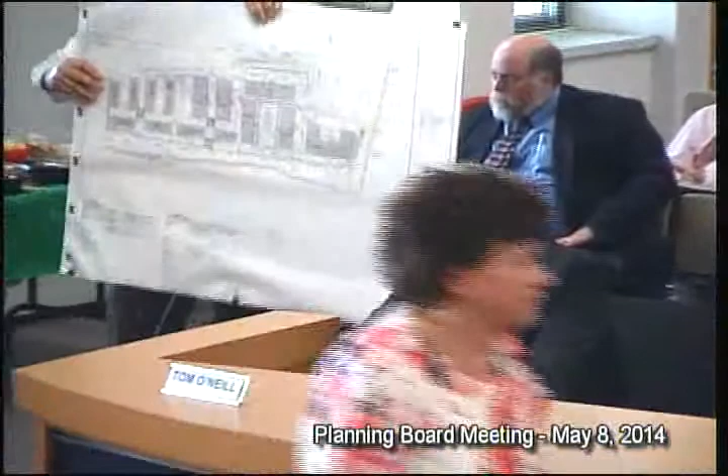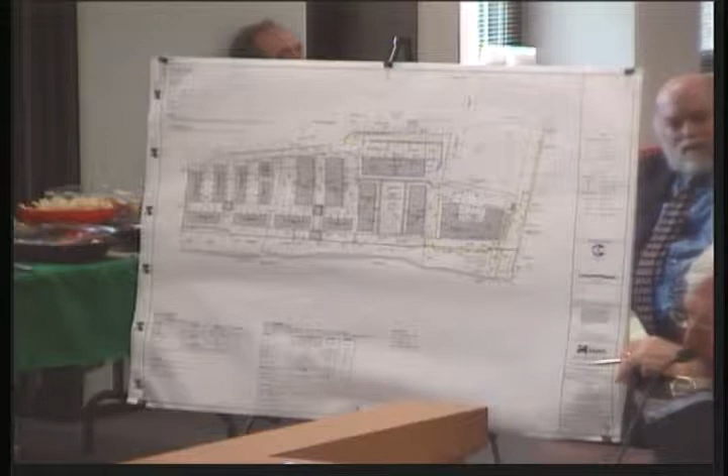Can we move the easel so the camera can pick it up? That way people will know where buildings A, B, C, whatever are on the site plan. All right, Carol, that's much better. We also have another floating microphone over here if you want it. It sometimes takes 5 or 6 seconds to warm up. Wow, haven't heard that in a while. Could we get the city to come get all this technology? We're having a green screen installed next, for weather forecasts and all. Just don't wear green pants. Technology, wonderful, there we go.

So to orient everyone and have an understanding of what the project entails, the site plan is probably the best place to start. Everyone knows where the Dutton site is on the riverfront. It encompasses both the town of Poughkeepsie and the city of Poughkeepsie proper. About 2/3 to 3/4 of the site is in the city of Poughkeepsie, and about 1/4 to 1/3 is in the town.

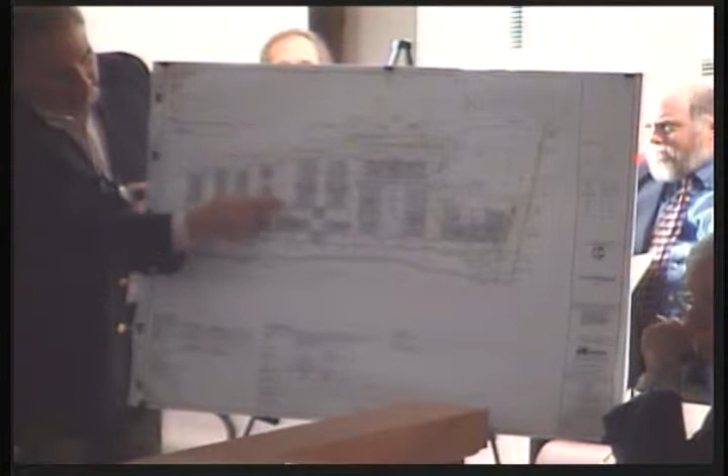The river is here, this is North Water Street, so the site sits between the river and North Water Street. It borders Dutchess Avenue on the south side, and the Hudson River Rowing Association property on the north side. There's a line that bisects the city property, which is really where Kidney Creek runs—an old riverbed.

So for the most part, from the Kidney Creek town-city line to the south, you can see there's a slew of buildings that we'll call building A, B, C, D, E, F, and then there are two we call stacked townhouse buildings that are along the riverfront itself.

In the town portion, we have stacked townhouses along the river. We've taken these stacked townhouse-style buildings and made them parallel with the river. From there, we have perpendicular buildings behind them that create auto courts between the buildings. So when you're on the river, or on the circulation spines of the site, especially in the town portion, you don't see the garage doors—you see the front porches. When we go through the architecture, you'll see the front facades have porches and windows that look out to the river and the views, but not the garage doors you've seen in a lot of other projects that we don't like.

The city side, again, we have two stacked townhouse-style projects, buildings here, and you have buildings E, F, behind the two stacked units. There are 4-story buildings, all, but the C and the B buildings are perpendicular to the building.

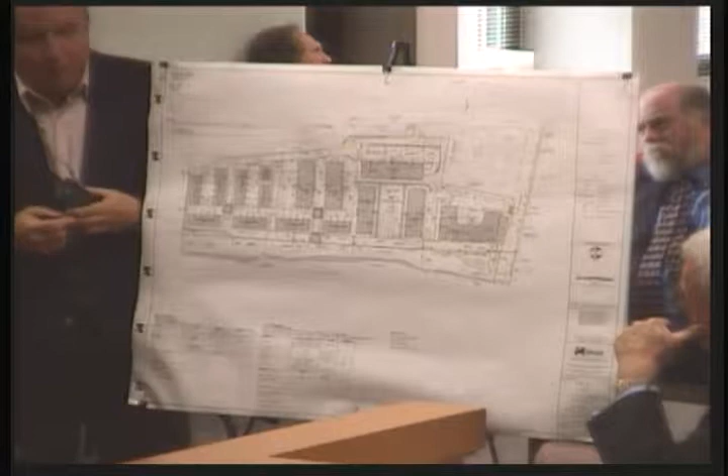So as you come down Dutchess, you would enter the site here at the end of Dutchess, and then you would come along the riverfront itself.

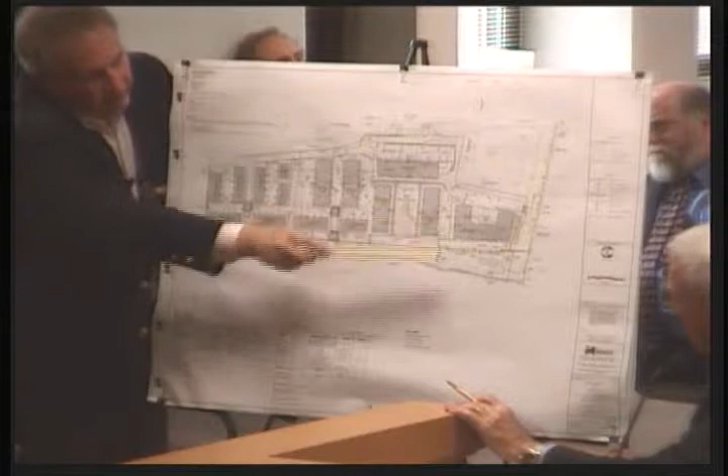The idea is that it gives a nice view for everyone who comes in, and even if you have a unit in the back, you still have the ability to see the river at some point during your day. We've also created vistas through the buildings. You don't have one large building or 2 or 3 large buildings; you have the ability to look through the vistas down these alleyways towards the river itself. So for the most part, I think we figured about 70% had views of the river, in some way, shape, or fashion.

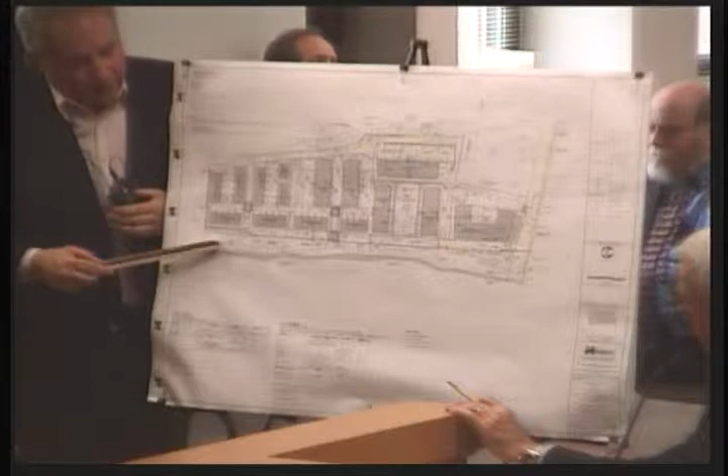The park itself will be built along the banks of the Hudson River, and it'll have an esplanade going the full length of the park itself. There'll be drop-off points, and there'll be access certainly from the project down onto the park and to the river.

The idea is that this project will be phased, and I believe it's 6 phases. If the board would like to see how it will be phased - but essentially this is a brownfield site.

It's been cleaned up, and you can see that the owner has put a tremendous effort into that cleanup. Before and after is amazing, even in its current state today. And at the end of that cleanup, there will be a capping of the whole site, and it will have basically grass and vegetation on the whole site.

Initially, the A building will start off the project, and right now the portion in the town is on the 6th phase. The park itself will be built about the 84th unit. Once the 84th unit is built and needs CO, the park has to come onto the site and be built in its totality.

Let's see, we'll go through the architecture now that we're oriented. This is the - do you want me to hand these around, or how do you want me to display these? Can you get them on the screen? Yeah, we'll come over.

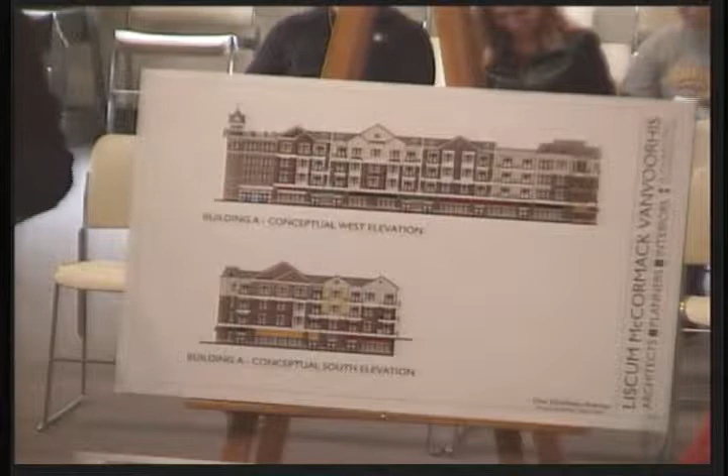There it goes. There we go. Perfect. We need easels over here.

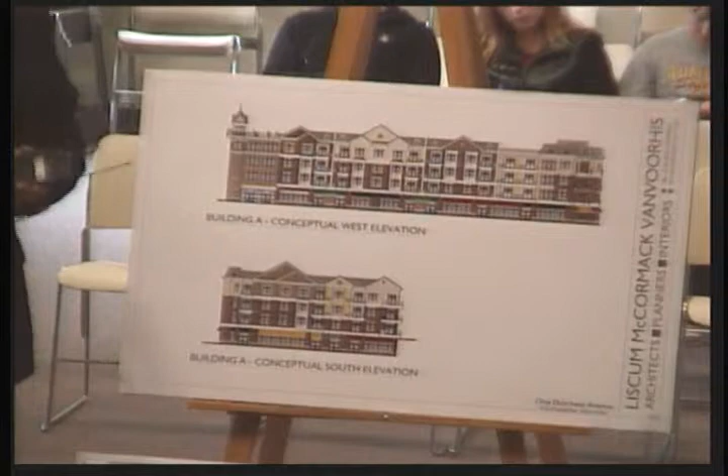So this is the A building, and what everyone can see - this long elevation is what you would see from the river itself. The shorter elevation is what you would see coming down Dutchess Avenue proper. And what we've done is we've created a facade with various materials: brick, HardiePlank, siding.

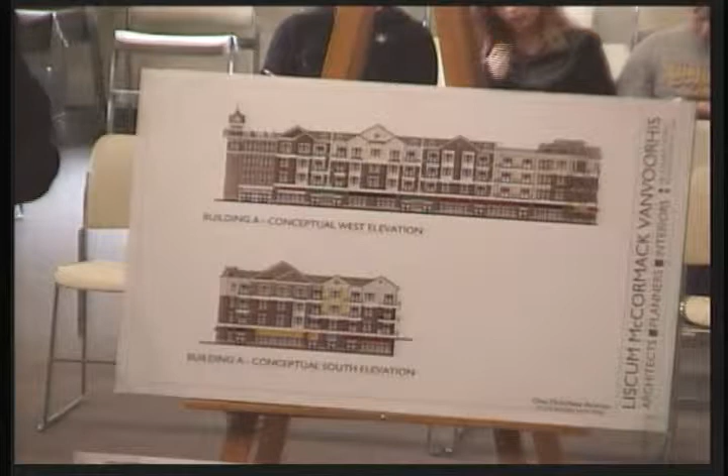We certainly have shingles and stone. We put stone in the elevation, and it actually makes a varied elevation in and out. It's not all one piece that's very flat - you have ins and outs that are 2, 3 feet and 4 feet in delta, so it creates a very varied elevation.

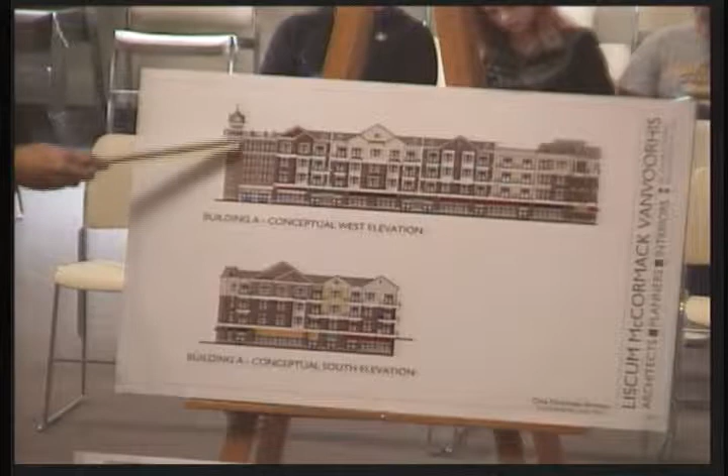We've created a tower element on this elevation that goes towards the northern part of the building itself. That tower element will actually have a rooftop garden area for residents, and potentially whomever else. There'll be another rooftop garden on the southern side of the elevation so that people can go up to the upper floor and enjoy the river itself.

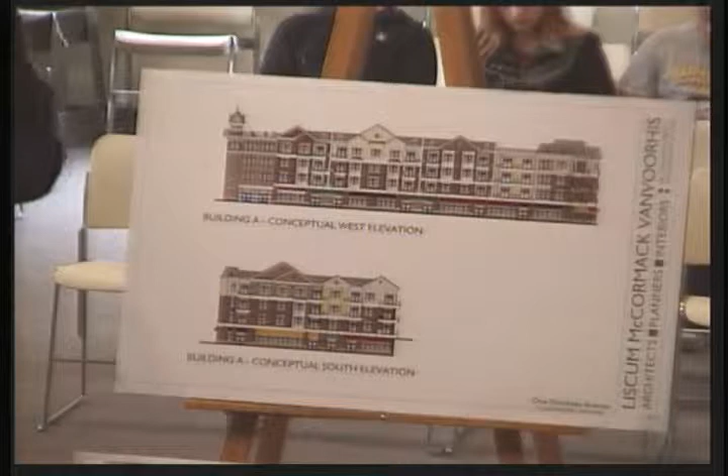This building is a mixed-use building, so the 3 floors above the first are residential. The first floor is retail and office and more commercial. It'll also have amenities for the site itself, indoor amenities such as a pool, health club, just space for like movies, things of that nature.

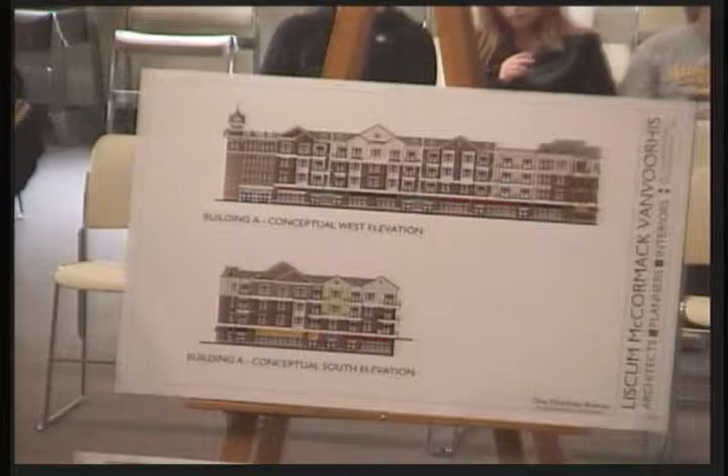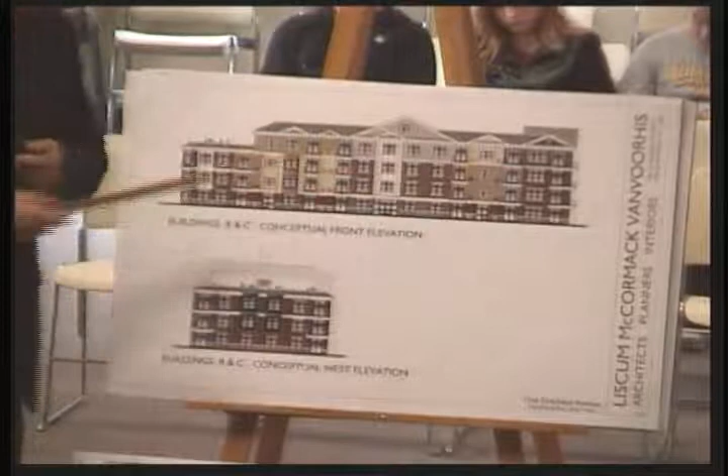The B building, let me see - let's go to the B and C building. The B and C buildings are the ones that are perpendicular after the A building. These are perpendicular to the river, so you would actually see this facade, the shorter facade, from the riverfront. You would see these facades from inside the inner court.

Between the B, C, D buildings is a courtyard. The courtyard is for amenities, outdoor amenity space for the residents. It'll have a pool, spaces for outside entertainment.

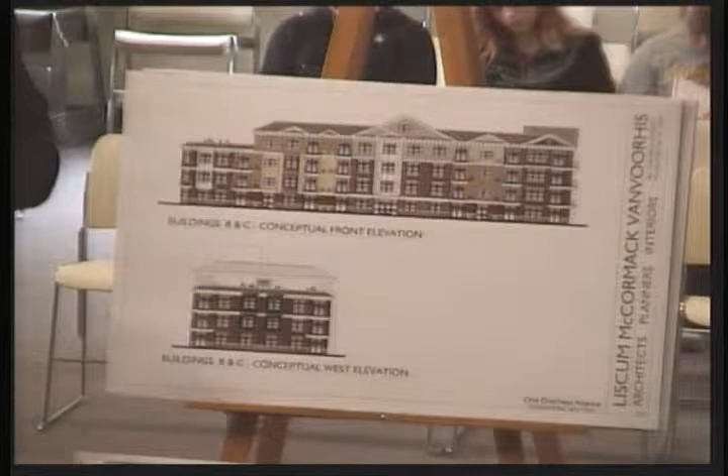It'll have anything that you could think of in terms of entertainment. If you wanted to live there, it's a great space to just hang out on the river, overlooking the river.

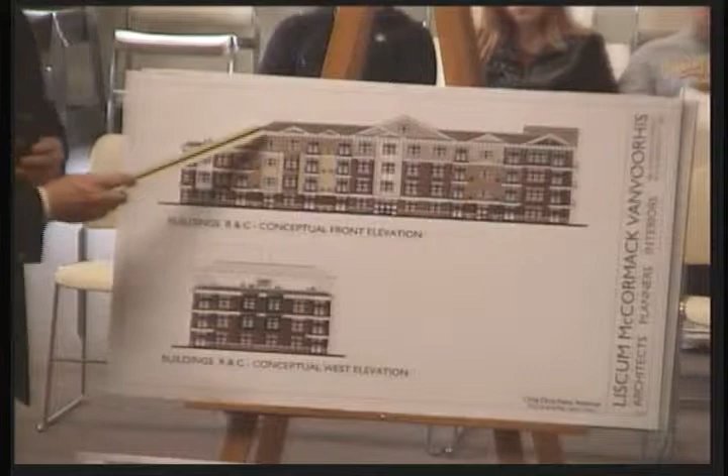We've also created a stepped effect with the B and C buildings, where the facade towards the river proper is 3 stories. It'll have another rooftop terrace on both the B and C buildings for the residents, and it steps back up to the remainder building for a 4-story building.

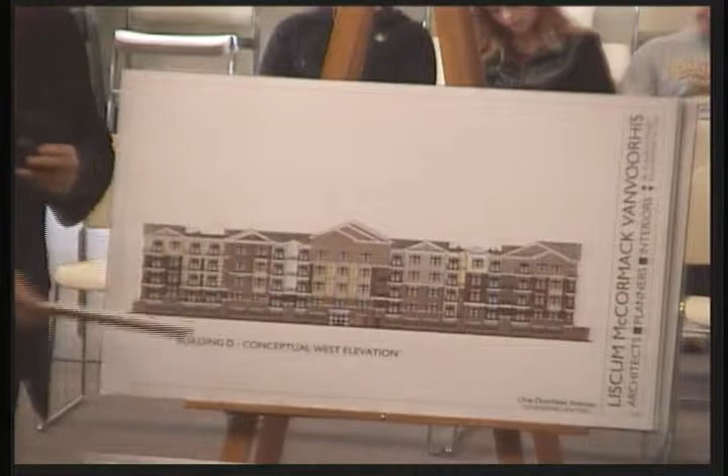The D building, which is actually the furthest building away from the river proper, you can see what it does. This is the backdrop. This is where you have the structured parking, and you have the building on top of the structured parking. It'll fit into the hill, so the building around the sides actually slopes up so that it creates a nook, a notch into the hillside.

Again, what we've done here is we've also given some rooftop garden areas on the upper level, and it creates a backdrop for the B and C buildings to the D building. And they all actually tier up away from the river.

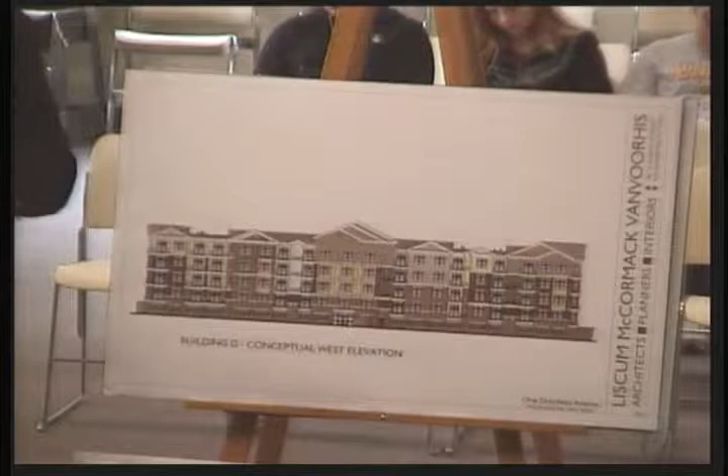So if you think about it, buildings B and C have a 3-story structure, going to a 4-story structure, and then as it slopes up, the D building is higher than those. So it won't be one flat level building whatsoever. It will give a courtyard that has hierarchy from the back and sloping down towards the river.

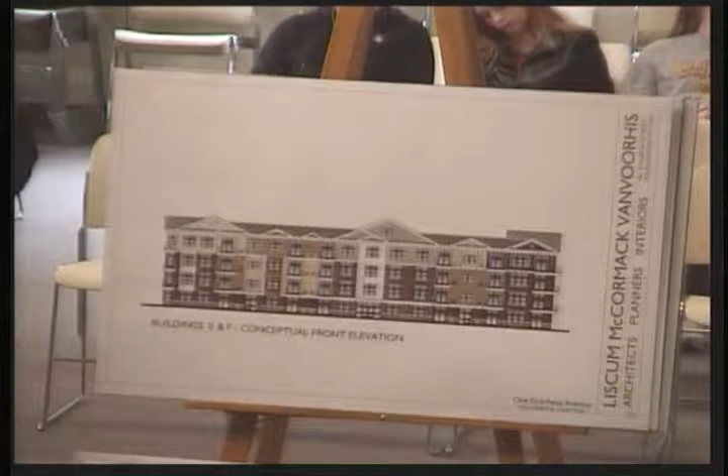The E and F buildings, which are behind the stacked townhomes, are again perpendicular to the river, and they look very similar in terms of the architecture of the B and C buildings.

The texture of the buildings themselves are varied, and I'll show you some thoughts of how we arrived at this. But all the materials are inherent to the area and relative. We certainly have brick, sidings, and different types of roofing that we're using in the different neighborhoods of the city and town of Poughkeepsie. Again, it's not like you would find this in Phoenix, Arizona or Dallas, Texas. These are materials, and the shapes and forms are what you see around us.

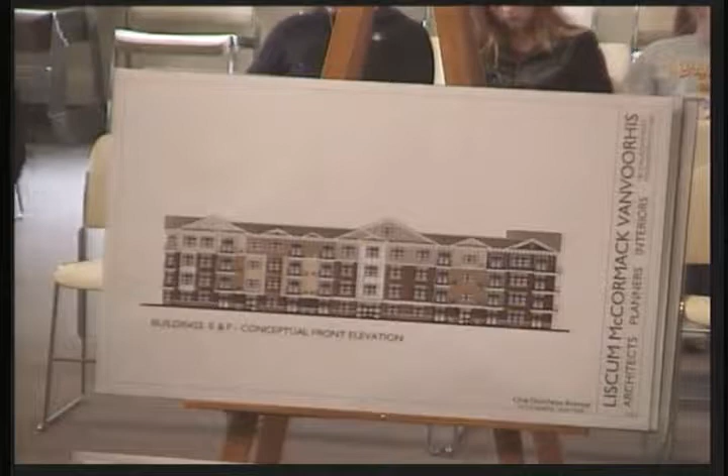The stacked townhome buildings are essentially, as we said, stacked townhomes. This longer elevation and this one are actually side-by-side buildings that you would see from the riverfront. This is the front of the buildings. The back of the buildings would have the garages. You don't see the garages unless you're really driving your own vehicle onto the site.

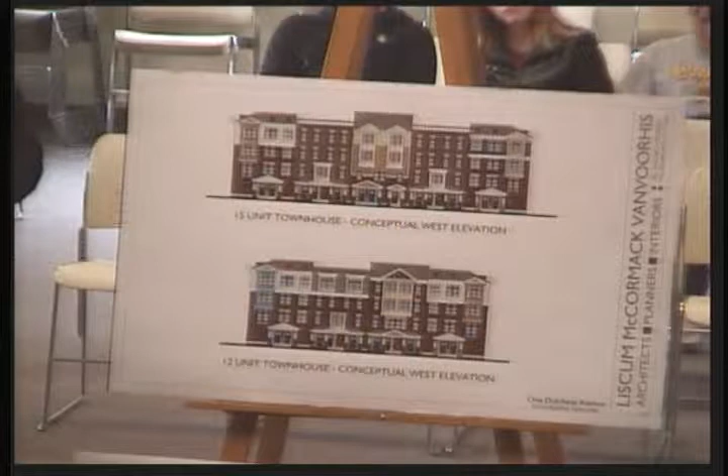You shouldn't. Along the front facades, we have porches and things of that nature, so that people can, if they wanted to, sit out or walk down to the river, walk out into the neighborhood. And again, the ups and downs and the varied roof types are there to give a varied elevation, so it starts to look more organic in terms of its growth than non-organic.

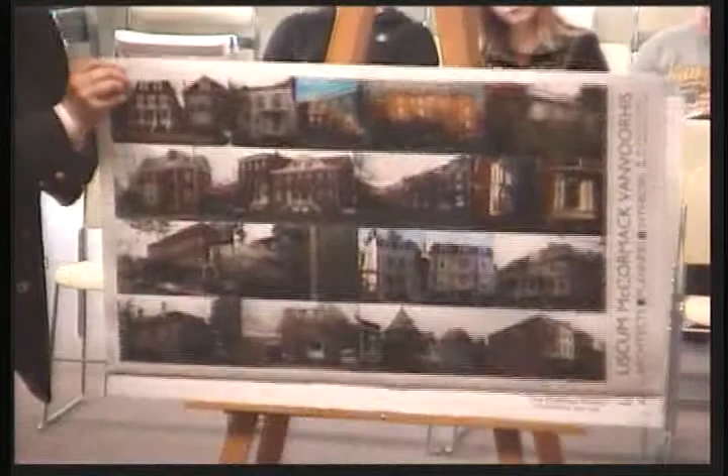We took some shots around the area proper, and you can see where some of the architectural elements have come from. As an example, these pop-outs and jut-outs, like around this and these areas, and on these buildings, these pieces that are popping out in different areas are certainly inherent in areas on Eastman, which is right here.

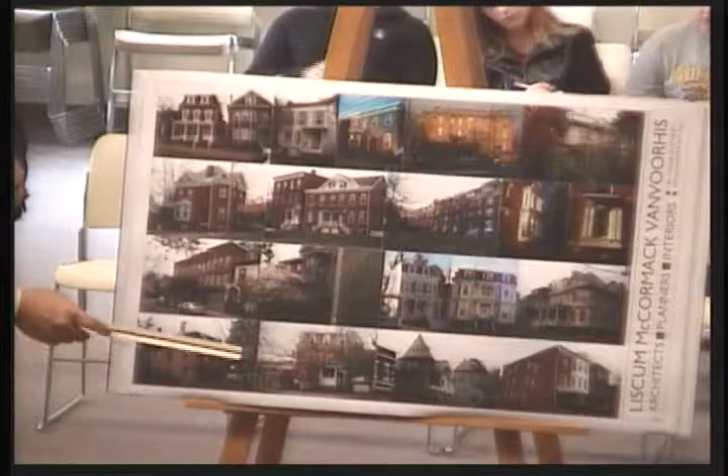These type of elements we have, certainly you can see that element, which on the B and C buildings reflects a mansard that actually does not have a rooftop garden, but that's the idea. You would have a rooftop garden on top of that mansard.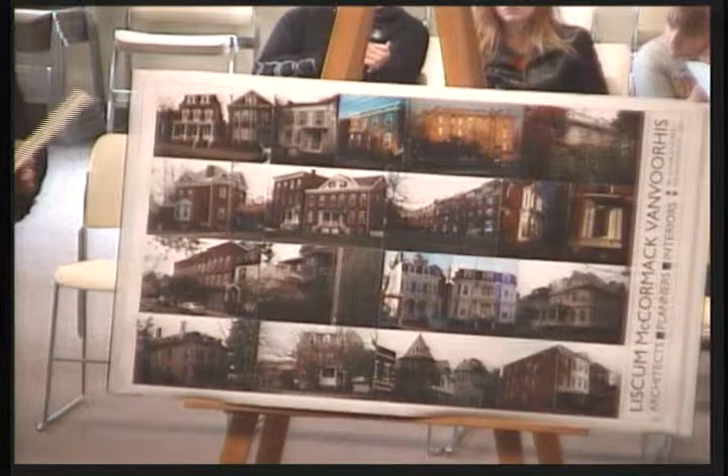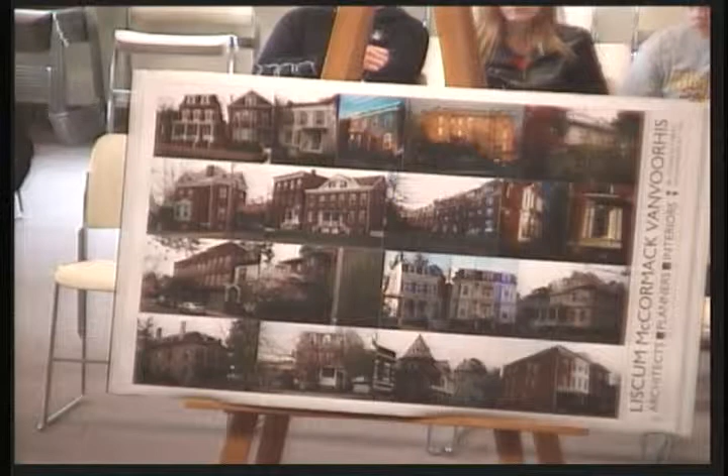Again, we have these sort of dormer elements all over that we find in our area, the pop-out element, the row house idea, we have clapboard, and all this type of architecture that we see proper in our area is being implemented into our design on purpose. Again, brick, siding, some detailing in terms of the facades, that's what we've tried to replicate.

Questions? What about the town? These are in the town and the city. Depends where you are. What's that? Oh, no Galleria. No, we aren't going to go to Galleria.

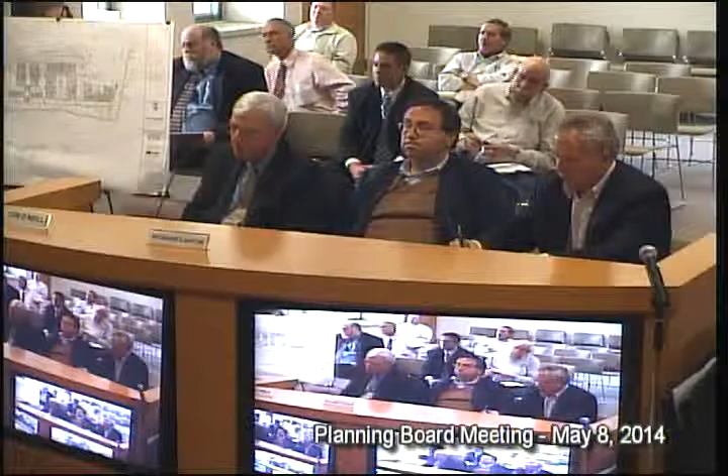The cleanup effort and capping at the DeLaval site, if I'm not mistaken, took out a tremendous amount of dirt, had it cleaned, and then brought it back. I don't know if the procedure was the same kind of routine here, or different. Lou, or maybe Andrew, can you answer that?

Good afternoon. Did you want to grab the floating mic? Sure, basis for the residents.

Are you asking about the process of the cleanup? The soils - there was demolition involved, underground and above-ground storage tanks removed. No soils were cleaned and returned; they were exported off-site. All of the export has been completed, and it went to various landfills that accept these contaminated soils and other debris. They won't be returning to this site.

In its place, under the very careful guideline and auspices of the DEC, we've had certified clean fill placed on the site - that process is happening right now. Above the existing soils that were not removed is a demarcation layer, essentially a visual reminder of where it stopped, like orange fabric, and then the soils go above that. There's approximately 150 to 180,000 yards of fill being imported right now - a significant amount.

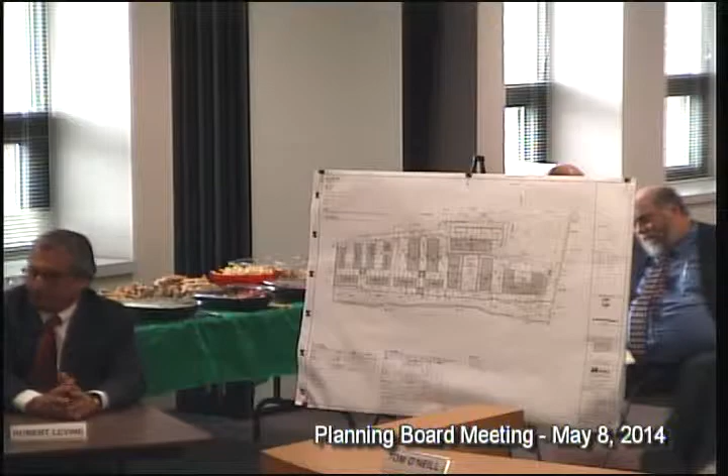Okay, we've gone back and forth in terms of construction point of view and financing and things of that nature. The phases are as shown here, but we think that in terms of how we'll actually construct it, we probably will build buildings C first, which are 41 units.

Well, hang on a minute. You guys aren't even agreeing on what you want to do. I don't want to do your planning in front of this board, so you need to give us some idea at what point you're going to get to 84. It's just a new question, that's the change.

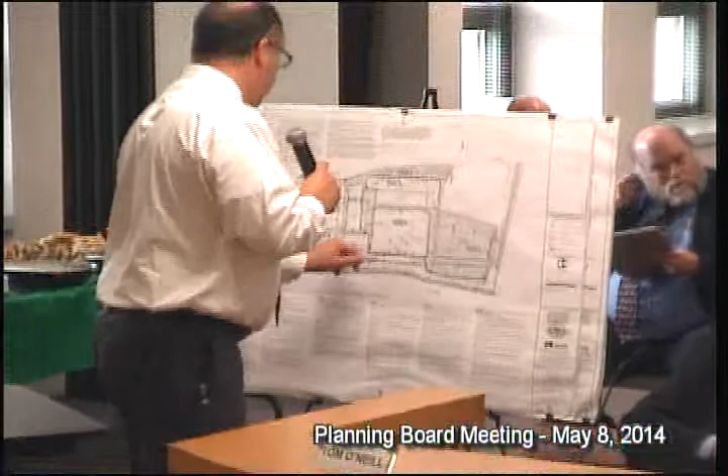The phasing, first off, was not a conflict. Our phasing was, number one here was 51 units, and then we were adding in another 12 and 15 on phase two, these townhomes. Phase three would be the park. So we'd be under that 84 units before we did the park. 84 was the limit, was the maximum. We probably were not approaching the maximum.

Well, it was 84 before you had to get the park, and the park had to be completed. So the question was, is it going to be building A plus some number of units in building B, or is it A plus building part of C or D? No, the phasing is building A, utilities and other necessary, and then these two townhomes that are in the city.

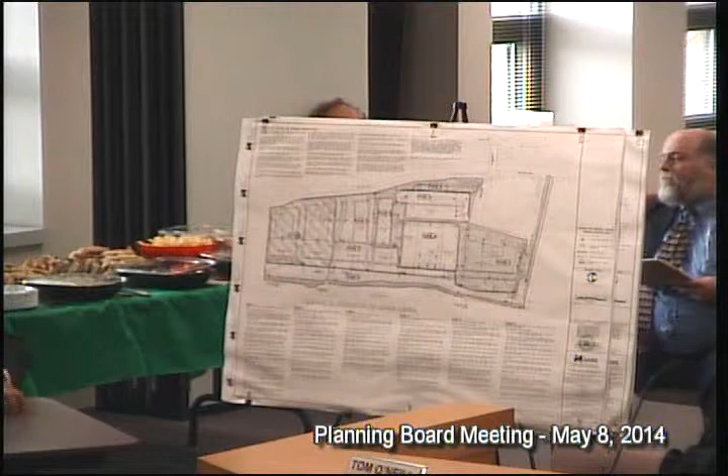There's 12 here, 15 here, and then the 51, so we're under 84, below the maximum number of units. And then we build the park, and then the project continues. And that's what the phasing shows. That's the plan of record, that's the one you have, that's the one that's been submitted to the city and the town as of January.

So it sounds like you're going to have a discussion about that at some point. Well, things change. Understand, sure, but that's the plan as of January. Okay, great, thank you, good question.

One more question. The cleanup, is that going to require ongoing monitoring? After you get a final letter from the DEC and they go away, or is there ongoing monitoring required? Lou, could you answer, that was my question. Ongoing, he says, ongoing. So would we receive copies of the reports issued by the DEC or whoever the monitoring agency is? You got to come up and talk to the microphone so it's recorded.

The DEC is the monitoring agency, and it's annual reporting. So they conduct the testing once a year? Yes. Okay, great, thank you. And it's right there in all the approved plans. It's a publicly accessible document, and I can't say with absolute certainty, but I believe the town and the city might be directed specifically.

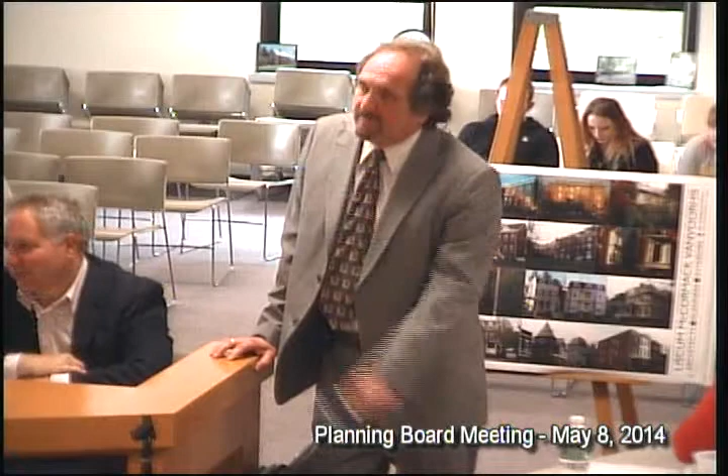Yeah, I guess I like that Peter took my question about the 84 unit there, so that was good, got that out in the open. I like the rooftop gardens that you've included on some of those. It looks like pretty consistent architecture between the town and the city, those buildings, the townhomes.

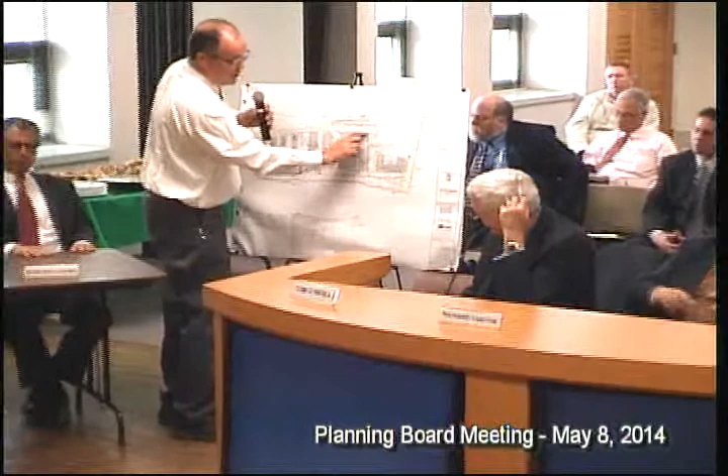Thank you. Does the parking garage access come all from North Water Street there, or is there some access coming from within the site as well? Oh, it comes off of North Water Street. It's all just off north, and then right, well, a little bit internal, but never from the river proper. You could access it from the roadway. Oh, you could, okay, you could get in this way, loop down underneath. There'll be circulation on the lower floor, whether from the garage, which is underneath Building D, to the garage, to the first floor of the garage here. You could access off North Water to the upper level of the garage, or go down to the bottom, proceeding to the development proper, or going right into the lower level. So a number of ways to get there. Okay, but it's mostly off of North Water, Carl. Yep.

Have you made any, back to, I guess my last question is concerning the trail.

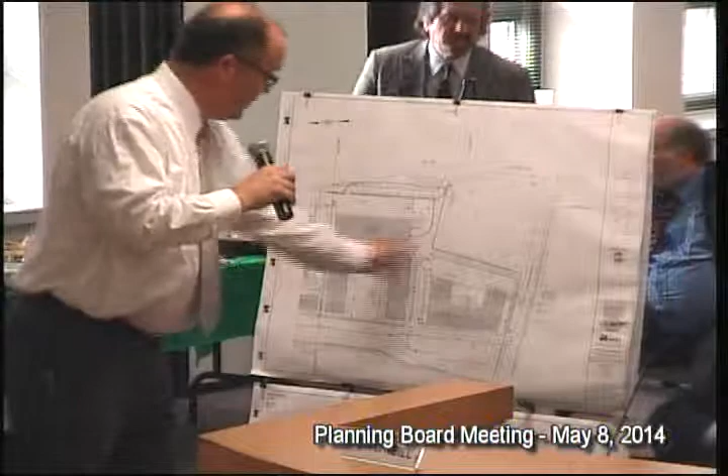In order to make it easier to see, what we did was split the site about in half - not on the municipal boundary, just to make a larger scale - so we showed the southern half of the site on one side and the northern half on the other. So I'm looking at the southern side. The park right now, of course, we're going to have riprap going down into the water to provide a wave break.

Say elevation 0 is where we're going to start. The park begins at about elevation 4, rises ever so slightly across the path, and then slopes up - I believe we had a 1-on-3 or 1-on-4 slope - up to about elevation 10 at the road. The 100-year flood in the Hudson River is elevation 8, so the park would be permitted to be inundated during a 100-year storm, and storms slightly lower than that, similar to other parks on the river. What happens is the water comes up, deposits floatables, trash, lumber, floating logs and so on, which would have to be cleaned up - similar to what's done in parks up and down the Hudson.

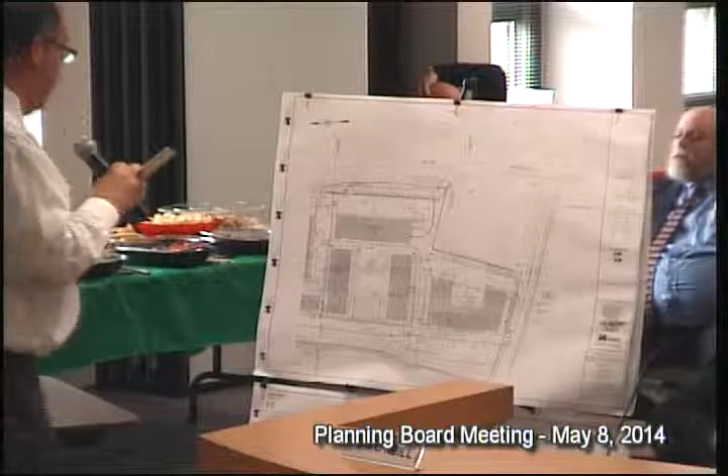The roadways are all up and out of the floodplain, so emergency responders can always get in, no matter the storm event, over the 100-year storm. The 100-year storm elevation was 8. The lowest elevation on the road is around 9.5 or 10, so we've got some freeboard, a factor of safety there as well.

For the buildings, I'll give you elevations—I have them on another plan. What happens is the roadways rise up, just like the site does now. It's very low at the river's edge, and rises mildly as it comes back. There's a rock cut in this area that's very steep, and we're going to maintain that; we're not going to change it.

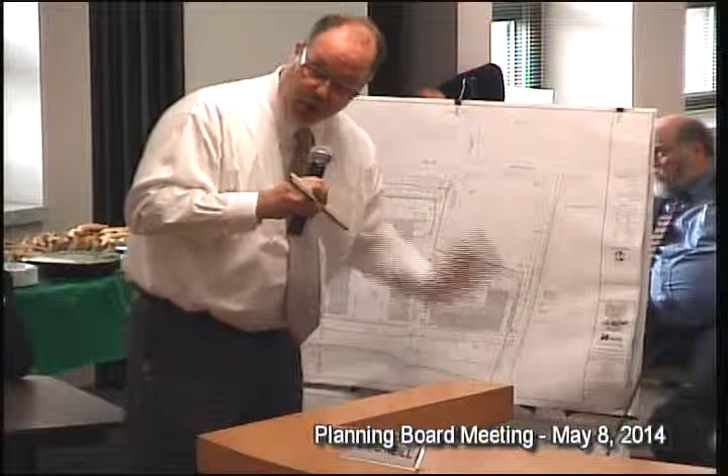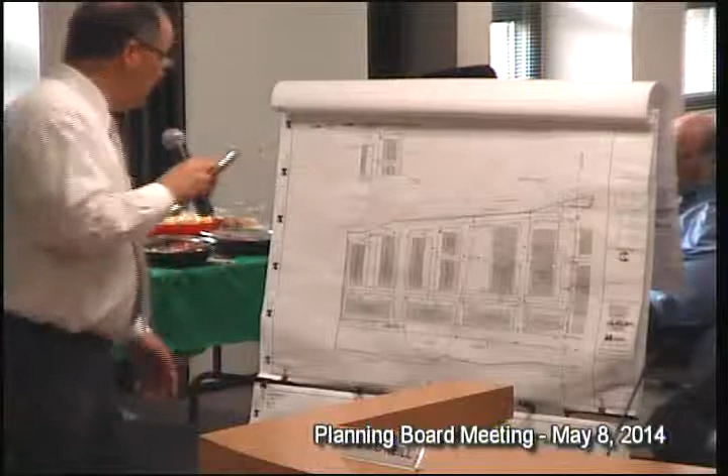All of the homes will be about 3 or more feet above flood stage—we're very conscious of that. We just had Sandy, which was the equivalent of about a 500-year storm event because it backed the water up and wouldn't let it go down the Hudson. We're conscious of that. The 500-year storm elevation is about 9.7, and we're well above that with both the first floor and the roadways. So we took all that into account.

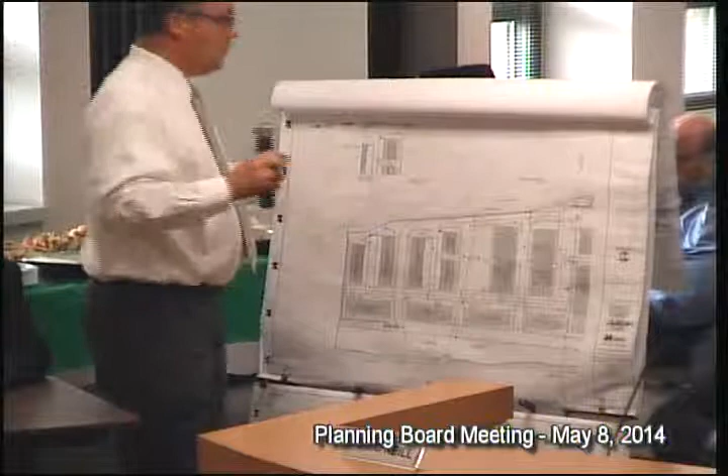Maybe we should put this on the table, Andrew, and respond. There have been requests by interested parties that the park area be raised higher than we're proposing, to keep it out of the storm area. It's my understanding from Lou—and I hope you can help explain—the position of the applicant as to why we cannot raise the park higher than described.

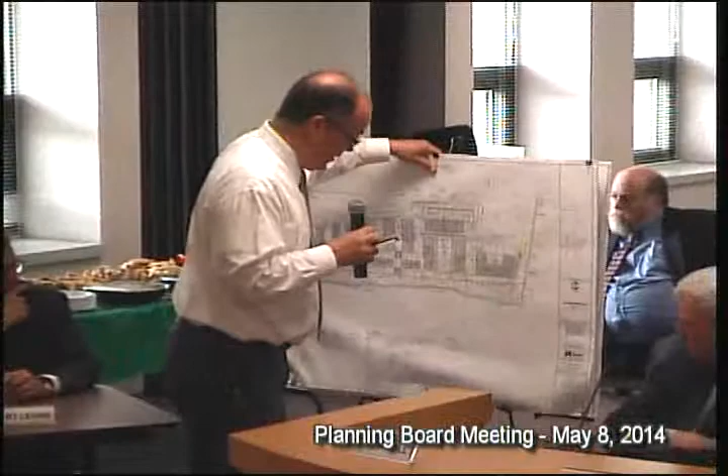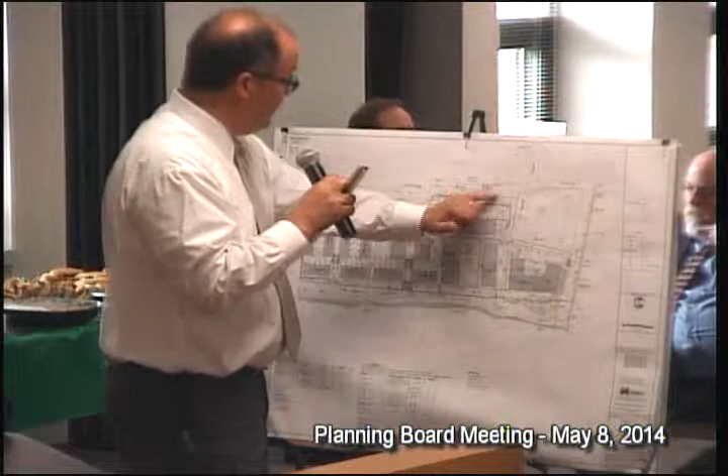One of the most contentious things about the entire development is the size of the park. We want to keep it as large as possible. This plan illustrates some changes we've made after the plans were submitted to you, so this isn't a plan you have. The plan you have shows parking inside the park—we removed that. We added a cul-de-sac, made this all public space and open to circulation, and brought the road back down to the bottom. But we still have to negotiate with the property owner to do that. We just can't fit everything.

So there are a couple of things we added to the plan. We're proposing riprap at the waterfront, similar to Waryas Park. We've heard the comments—Jeff left, but we heard him, we got his book, and Liz had the same comment I think—to do some soft shore. So we're going to mix it up; we do have some soft shore proposed. It wasn't on the plans you received, but we were going to mix it up.

That soft shore rises back at about a 1-on-2 slope, so for every foot you rise, you lose 2 feet of park. We can't go farther into the water—we're not filling any more into the water—we're going back from there instead. So the farther you rise, the farther back you're coming.

There's a tremendous cost to bring in this fill as well. And there's no sense having a park above flood stage when no one's going to be there at flood stage—nobody's going to be walking along the river during a 100-year storm, not in their right mind.

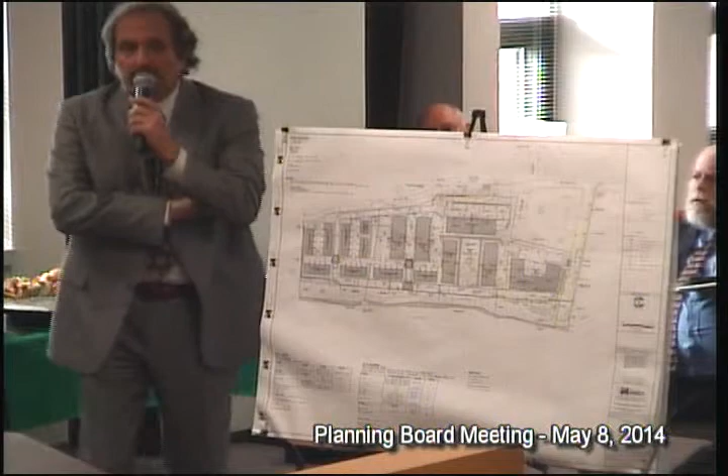One more point worth making: the parks along the shore are all at one level, so raising our new public park another 5 feet would be totally incongruous with the entire walkway and the Greenway Trail. And the final, maybe biggest concern, is that this is the approved plan with the DEC, and to vary from that would require a whole review and years of delay.

Okay, thank you. John, could I ask a quick question? Go ahead.

Just real quick, I like parks, don't get me wrong. But one of my issues here as a fire chief is trying to get in and out of a building, out of an area, and you've taken the parking away for the park. Where do we anticipate these people leaving their vehicles? We have regattas, we have Balloon Fest, parking down at the riverfront when these events happen. It makes ingress and egress very difficult for us as the fire department, especially when we have large numbers of people here.

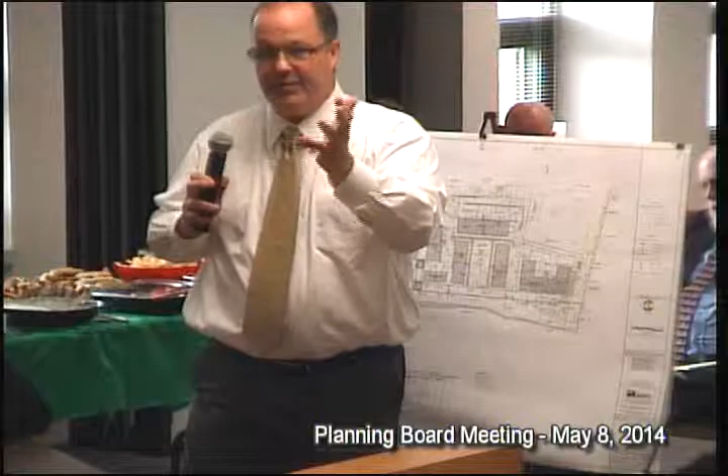Right, we heard that too, lack of parking for events. We got that from either the city or the town. We're fortunate enough with Dutchess Avenue to have a 70-foot wide right-of-way, probably the most conventional thing that all your board members have ever seen on any of these subdivisions is 50 feet. It's 70 feet wide, and it affords us the opportunity to do a great deal of parking on Dutchess Avenue.

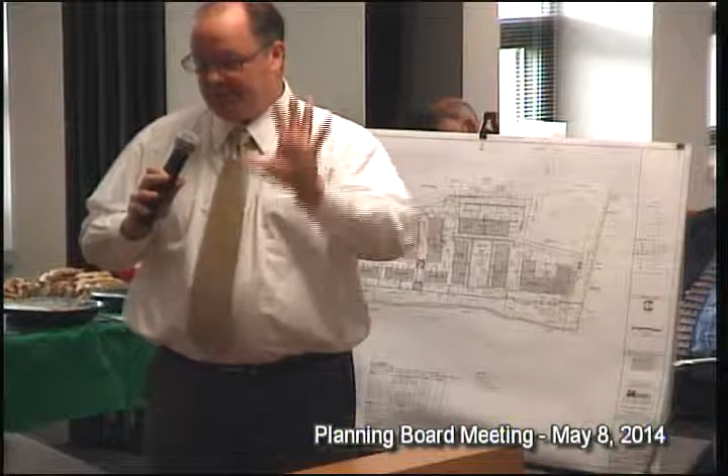A couple of spaces down at the bottom at the cul-de-sac, and this circular area here is open to the public. We're probably going around Building A, and we'll have to mark some of those spaces off as private so we have enough for our property owners, the residential, the retail users. So there'll have to be some division of those spaces, but we did add quite a few spaces utilizing Dutchess Avenue, still giving you I think 26 to 28-foot minimum width. 26 feet is correct.

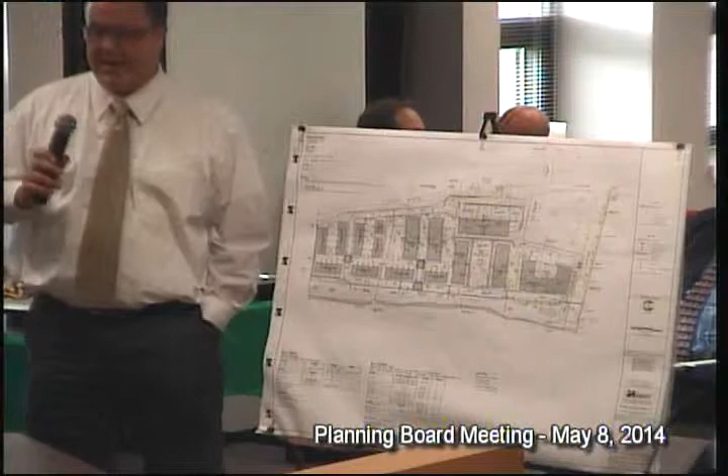This is probably an irrelevant question, but would the owners here, the condominium purchasers, be required to have flood insurance? No, because we're up and out, up and out by feet, like three and a quarter feet above the 100-year flood stage right now. So the answer is no. The other reason we did this, we didn't want to have that terrific burden on these owners or drive some owners away. So the answer is no.

Thank you. Neil, did you have something? Question, and actually I think this is really more of a question for Tom and Robert and Naomi. There was a plan circulated roughly about a year ago that had the development of the parkland as Phase 6. I stated my objections to it, and it got moved up to Phase 3. It seems to me, however, that even Phase 3 seems a little late in the process, particularly since we're now talking about city takeover of the ownership of that.

And the city's ownership of the parkland, speaking for myself, gives me comfort that it ensures public access to the waterfront, and ultimately that something will occur there in the way of paths and whatever else. I don't know ultimately what the city may choose to do with the park aside from the walking path. If you want to put swings and things like that down there, that's entirely up to the city. But I guess the question is, the representation is at the end of the process we will have a design for the waterfront, whatever that may actually look like.

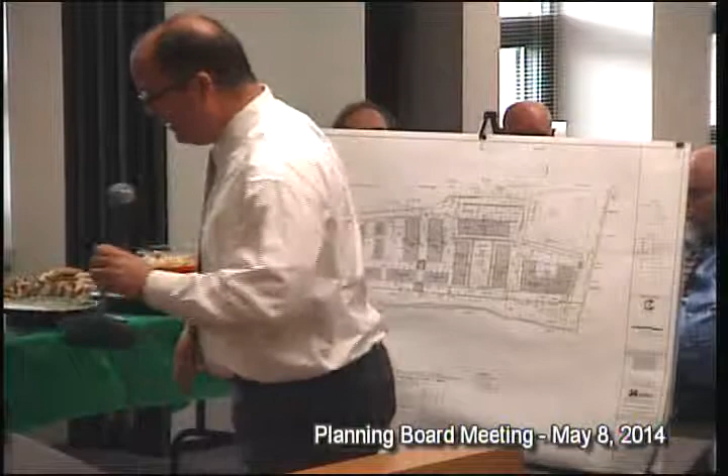But we have to understand that we had to generate some income to build the park.

Let me ask the question a different way then. I know that the town certainly intends to seek recreation fees for the residential units that will be constructed here, and that's independent of whatever may happen to the waterfront access, the public access. Is the city contemplating the same thing? Or are you looking to accept whatever you may have otherwise received in recreation fees to develop the parkland?

I don't know, I'm asking the question. Our board, I don't believe, has had that discussion. Because up until recently, this was, in essence, a joint venture with the town, and it is only recently that we've been approached with the concept that the city and the town's portions of this project would proceed independently. So I don't think we ever got to that actual issue as far as a final or semi-final determination.

And it's part of an ongoing process that has been very difficult. So you're still trying to figure out how this thing is ultimately going to be, who's going to pay for it and how it's going to be constructed. You may have design, but there's the implementation portion of it. Somebody's got to pay for it. Absolutely, we're not there yet. Through no fault of the planning board's. No, I understand.

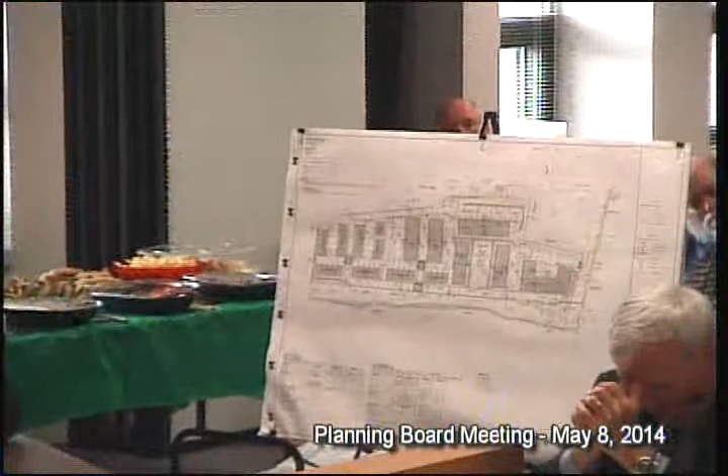Yeah, thank you, Mr. LaPerche. Yes, the state has looked favorably on the project, has already granted through the city, as the grantee, monies for the design of the park, which we were providing the matching funds for. So it was up to about $500,000, of which we were going to provide matching funds in the form of the cleanup that we were investing now.

We hope that the state will again look favorably toward implementing the construction of the park as well and help us with that, because we're not seeking funds from any of the municipalities. I think that's what Neil is also implying though - as soon as you have state funding that's basically taxpayer-driven, there's that need to make sure we see this continuation all the way through, including the town as well.

So it's just one of those - if I could build that park today and afford to do that right now and take it off this table, I would have done it, because that is the focus of all of our planning, all of the board discussions. It's all about the park, and the development is an afterthought.

We can sympathize with you. We have the state hospital project that we've been trying to get through some of that stuff as well. But the short answer is, the state has already indicated a desire to implement this, specifically toward the Greenway Trail, toward the park, and I hope that they will continue to act that way. We intend to put in a grant. The design park grant has been a little more difficult than we anticipated in processing, and I'm hoping that wouldn't trip us up on the actual construction.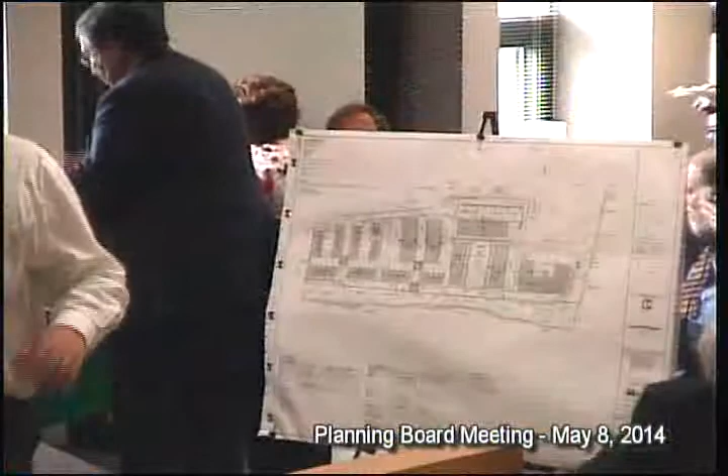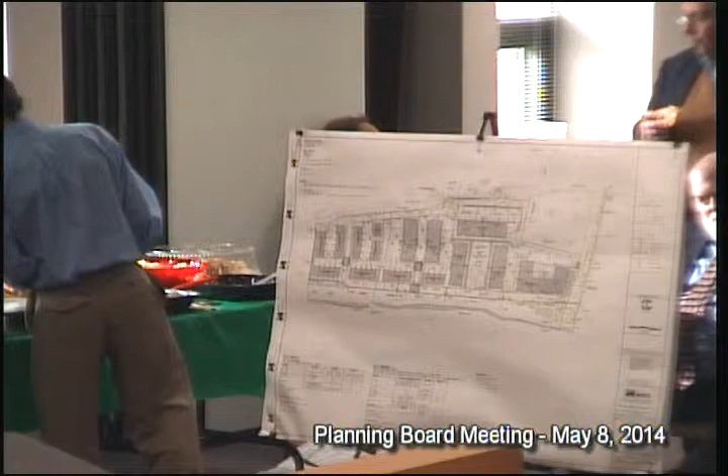That being the case, the entire site - all of the parking areas - my lowest elevation in a parking area is 10.5. The 100-year flood is 8. Yes, 2.5 feet above to park a car. Now the lowest floor is 3.25 feet above that. I'm telling you we've accounted for that, we looked at that.

I've got city and town engineering departments looking at me, and I've looked at that. The architect is also very concerned about the buildings, so we've placed them quite high.

So what happens, Marvin, is they have to look at this from an engineering point of view. The town engineer and the city engineer, along with the project engineer, will certainly take global warming into account, changing the rules we've had for 50 years or more. Everybody's trying to build new rules and new design standards. And that's all I'm looking at. I think there's a safety factor that will certainly be built into these calculations.

I'm trying to help you, Richard, I don't know. I just say you got younger. Richard said that he had to leave. He said, just sit there, nobody will even know that I'm gone.

I just want to clarify one issue with the remediation. Currently, DEC would be monitoring the remediation as it's progressing. They probably, like Lou said, do have people on there constantly. But there's not going to be any shovel in the ground until there's a certificate of completion of that remediation. And part of obtaining that is going to be a final engineering report that would show it was done according to specifications of DEC.

Do you want to discuss the architecture and the materials? Sure, do you want me to hand these around? Well, you could show. Where is that? Where's the other microphone? Why don't you put one of the boards up too that shows the typical building so we can see it. It's working. I'm sorry. Put one of the boards up that shows one of the buildings. Hey, how could you? I'm the chairman, I can't eat. You want me to get your book? Oh, that's good, I'm good.

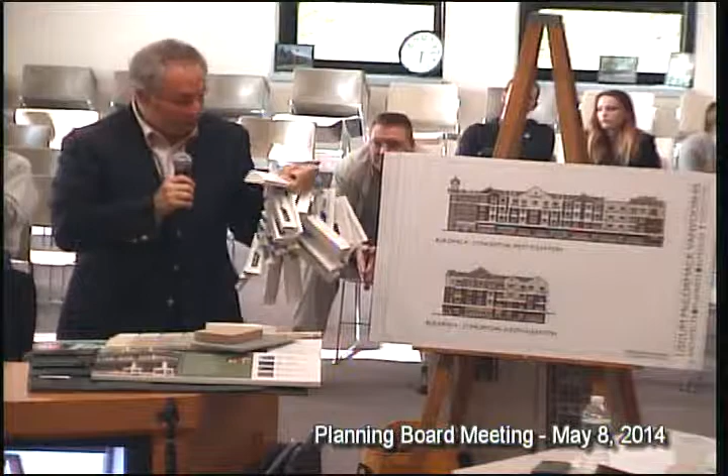This is AZEK, a material that we use for trim work and things of that nature. It's a synthetic material, it's hardy, it will last a long time. It's something we will need on the river with what we have for elements. And this, you can see, would be where the white would be—any white trim, anything of that nature would be of this material.

Is that glued on or nailed on? No, they nail it. And then this, again, is the AZEK material, for the larger areas you would see, like in between the windows and things of that nature. Again, it's the same material base, just a different type—larger sheet materials.

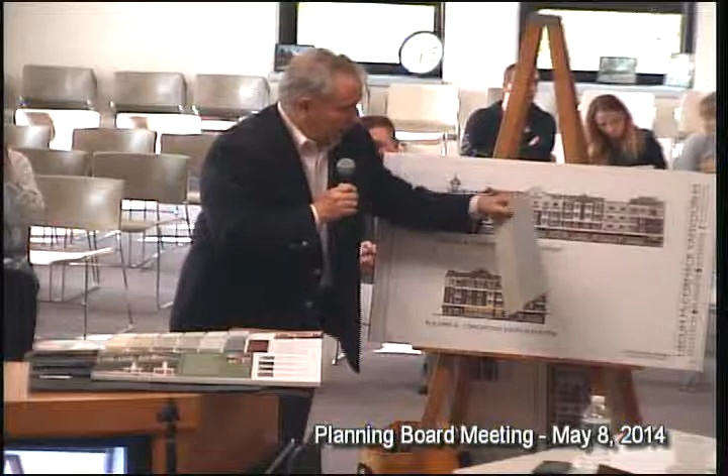These are the shingles that you would find up in the gable ends in some of the areas. These are synthetic materials that are attached. In terms of the finish, they are long-lasting and weather-resistant. This is what you really want in this environment. When we talk about the environment of this project, it's on the river—there's a lot of wind, snow, and sleet that occurs that you won't find inland. So you need very hardy materials that will not break down over a period of time.

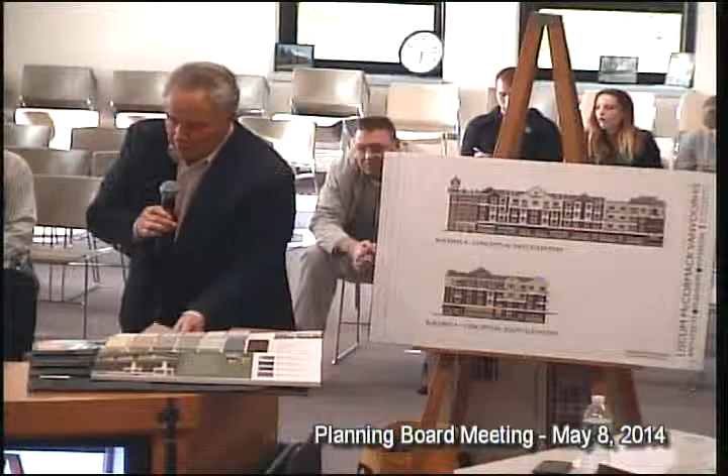This is the siding material—a Hardie board plank, Hardie material. This is what you can see. It's a cementitious-based material. It comes pre-finished, and it's a nailed surface, sometimes screwed. It's pre-finished so that there's a long-lasting finished material that will be there for a very long amount of time without maintenance needs.

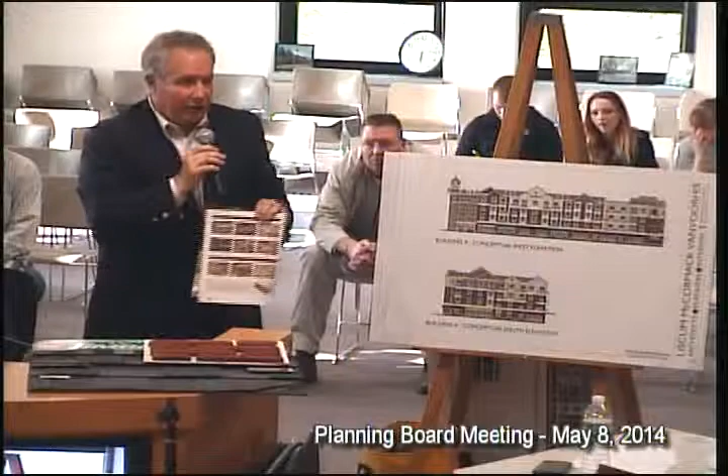I just have photos of the stone base material. We have not selected the exact materials for the stone or the brick itself, but this will give you a palette of what can be attained. It'll look like a Hudson Valley stone—not a rounded stone like you'd find out west or down south. It'll basically look like a stacked stone.

The brick will be what I always call a reddish brick. It won't be pink or yellow or anything of that nature—it'll be a true brick color. So again, evoking back, you can see that on this elevation.

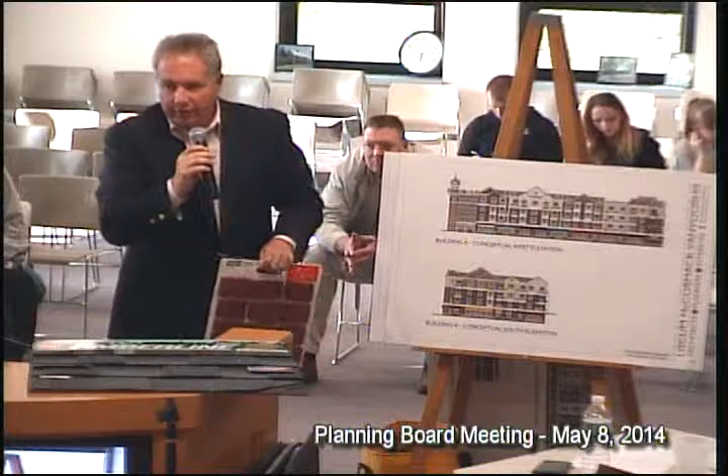We used to manufacture a lot of bricks here. They used to manufacture a lot of bricks here in Poughkeepsie. Yeah, the brick factories were the staple of this area.

That's why we as architects like to use brick in this area, just because that's what we had. When we look at this type of project, it's really recalling what we had here in the valley for a long time. As you can see, it's not a modern-looking structure—it looks like it should have been here for a while.

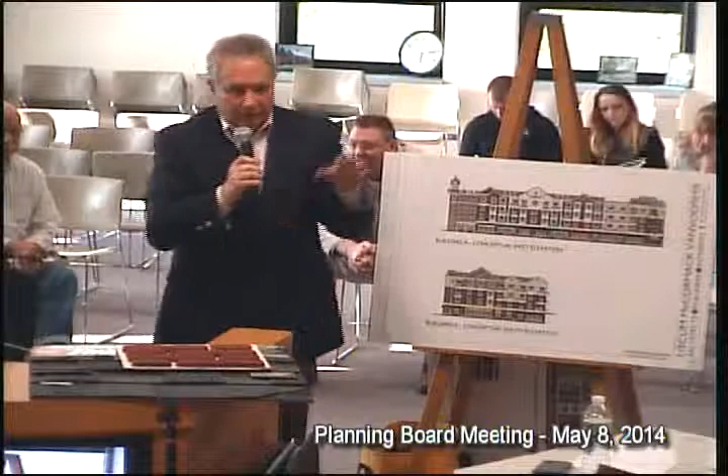And that was what we're trying to evoke here. The shingles are a baseline heavyweight shingle, timberline or something of that nature. As we go along and come closer to conclusion and final approvals, we'll bring exact materials as the architecture evolves further. But essentially, these are the palettes that we're talking about.

This is certainly head and shoulders above what you showed us a while back. You've listened to what we had to say, and you've made some very appropriate and substantial changes. I for one think it looks pretty darn good.

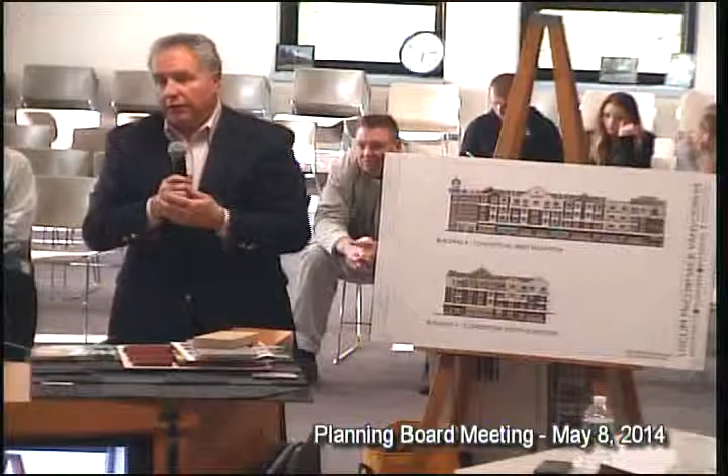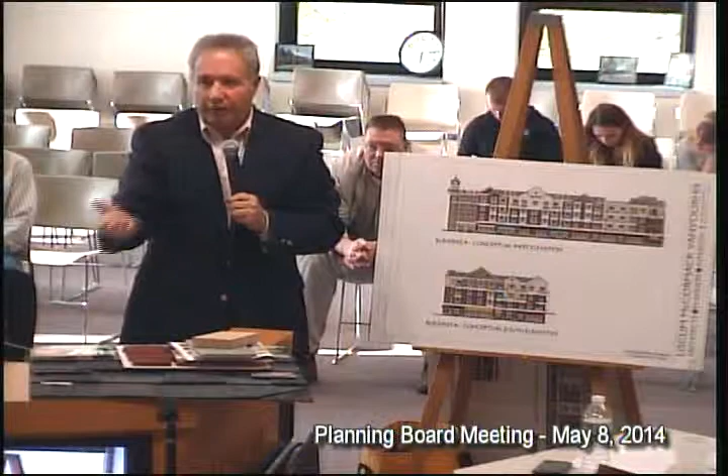Thank you. As a project of this magnitude progresses, we take the thoughts of the board very much to heart, and I think it makes a better project. That's what we're trying to do for everyone—the boards in both the city and the town, and also the residents of the area. The idea is that this project will look, when it's done, like it's been here for a long time. It'll start to bring the city back to the riverfront instead of receding away from it, which has happened for a very long period of time.

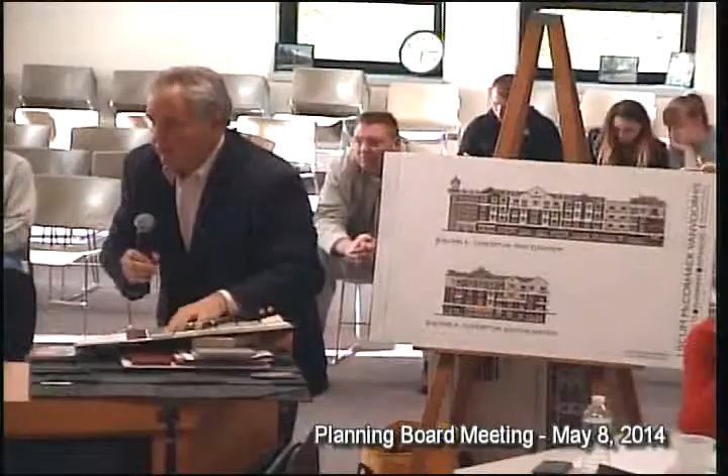Any comments or input on the architecture? One part of our town code is that you don't have any big, long expanse that looks all the same. The way you've done it here makes it look like multiple buildings, and that is a good thing. Yeah, we certainly did that on purpose, Carl.

Tom, anything? Liz, anybody, any questions? I did have a couple of questions. One of the things, I know there was discussion of cleanup, and one of the things that keeps coming up is what has already been done or will still be done with the state-owned land in terms of cleanup.

The entire parcel has been cleaned up. We haven't bifurcated that, so to speak, so we're treating it as one parcel for the purposes of the cleanup. All of the contaminants on the parkland itself - there was a building, underground storage tank, railroad tracks and ties, and impacted soils. Those have all been removed, and the fill process will continue.

The only part of the cleanup that remains is the river edge - we're still working on that design, which has been submitted. It's primarily riprap, but with some vegetation interspersed with it, similar to the proposed designs in the developing the waterfront literature given out by Scenic Hudson. But other than that, it's a fairly simple cap - it's just the levels of the cap. In the park area, it's a 2-foot level, and as you get into the development area, it's higher than that to pull it out of the floodplain. We haven't avoided cleaning up - we've been cleaning up everything.

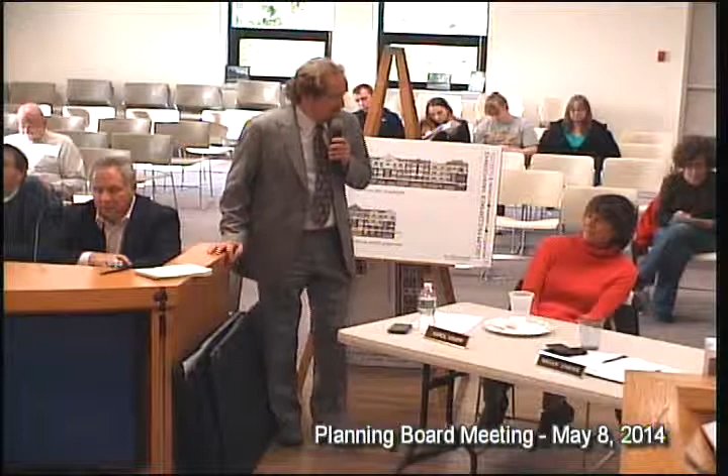That'll be built into the deal, maintenance and so on, I assume, right? Yeah, it's my understanding that as part of the site stabilization, at the termination of the cleanup, they're going to seed it — got to get out there and mow it occasionally. But aside from that, that's what we'll have until they actually construct on it. So if it's not mowed regularly, it'll end up as a field with litter and everything else. Yeah, if it comes to that, the town has a property maintenance code — we'll start issuing tickets.

Neil, I have a question. As Tom said before, we in the city have been working on this project for over a couple of years — it even started earlier in 2008, but the past couple of years we've really been working on it. My question is, how do you think it's going to go? Is it going to be a long-term thing, or can you go through it quickly? Because we've done so much of the project — the building, the park, the land, everything. Is there any way you can speed up your approvals so the project can get going?